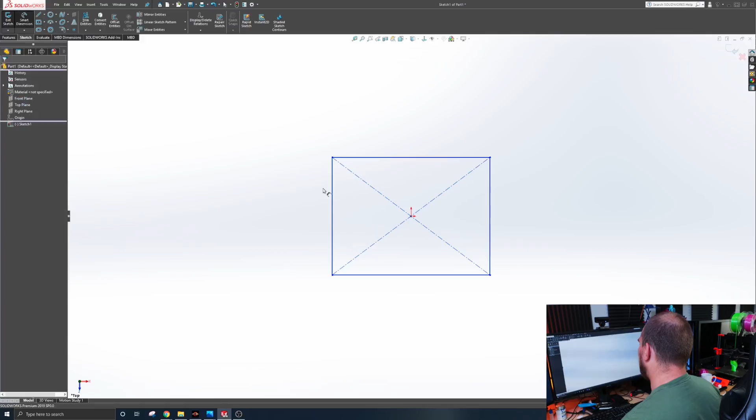Let's start with our base plate because that's where everything is going to start from, and like I said, we'll keep it simple and make it just a rectangle. We know it's got to be just bigger than a fan, so this rectangle is going to stand in for our fan bottom, so we know where it's going to lay. Want it to be on center, of course, and the easiest way to do that is just draw a line and make it horizontal. We know the dimensions of the fan, I believe, are 25 millimeters for this guy.

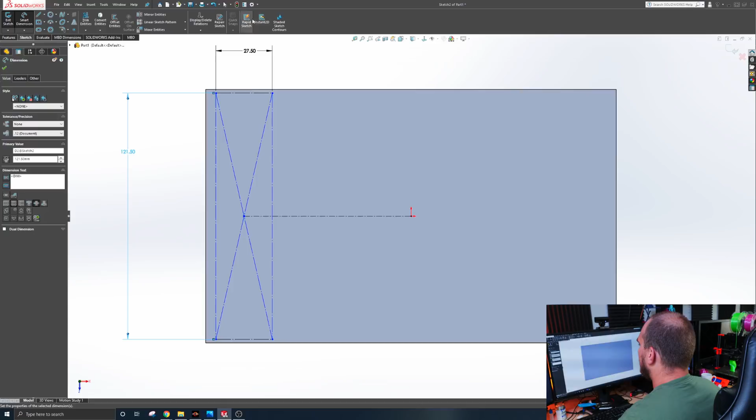2685, pretty sure that's about what we're gonna get. So we make it 27.5 - we know we got a little bit of wiggle room. Length, we'll measure it, but should be 120, 121.5, give us a little wiggle room. And we can see, what's our distance here? 1.75, we can make that wider.

Okay, that's what we want there, so now we'll just draw - basically we want locators on the corners. This is an easy way to do it without having to print a whole entire perimeter. Looking good, and now we just need to close all these up.

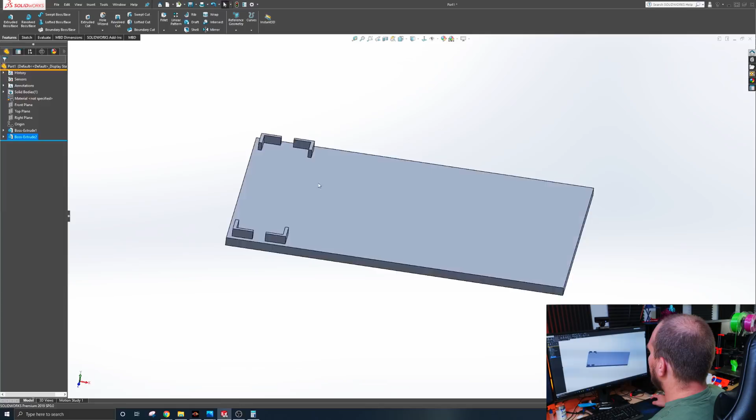Now we know our fan's going to be here, and we want the sensor head to be about 150 millimeters away. So that's going to be the base point for our holding collar, and we want it to come up 60 millimeters to put the sensor at the center of the fan disc. And there we go, we're starting something. That should hold our sensor.

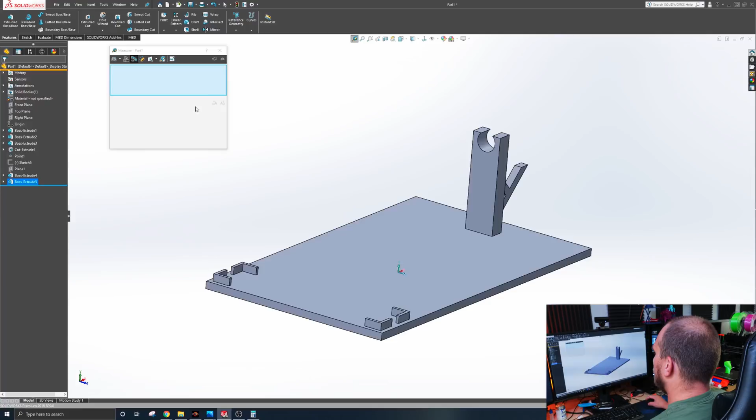All we got to do is make sure that this is all within the printable window of the Prusa. And we are just there, so we should be all right.

Now, one thing we could do is, this is a lot of wasted material since we only need this space and this space, so we can come up to the top. Why don't we cut some of this unneeded stuff away? And I think that'll do. Just put fillets around these corners just for looks.

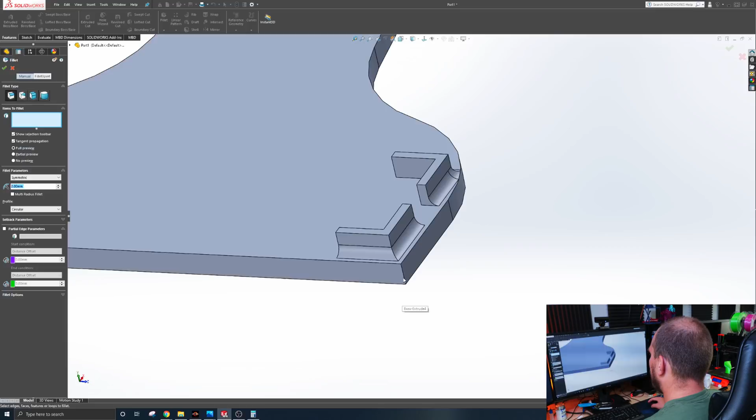So now we'll print that out and see if it does what we want it to. Hopefully it does, and we won't have to do it again.

So while we wait for that to print, we're gonna measure our space here for our victory board or our leaderboard, and go downstairs and try to make something that's not ugly.

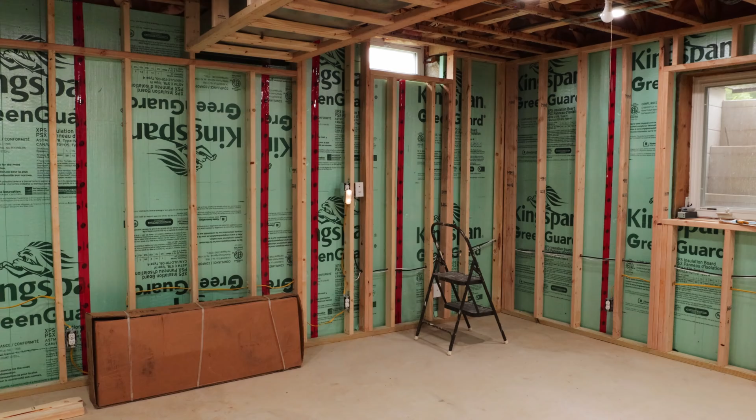So as you can see, the basement hasn't really progressed too much. I got all the electrical done, I guess. I got all my permits and everything signed, but yeah, there's no drywall. But I did have a contractor come out, look at finishing the space up, so I don't have to do it. So hopefully soon, this is where we will embark on all our projects.

But for now, we're gonna cut some wood down here. So let's get some wood, cut some 4-foot sections and see how many we need to get to 1 foot wide.

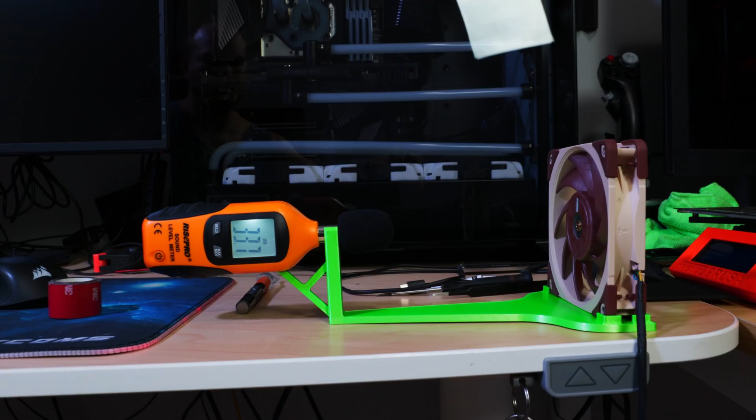And this thing works, so just so you know how I'm going to use it - fan goes here, dB meter goes here like we said. First thing I do is turn it on, get the room sound, because it's got to be in a controlled environment where it's nice and quiet. Then I'm going to turn the fan on, spin it all the way up, read what the dBA is.

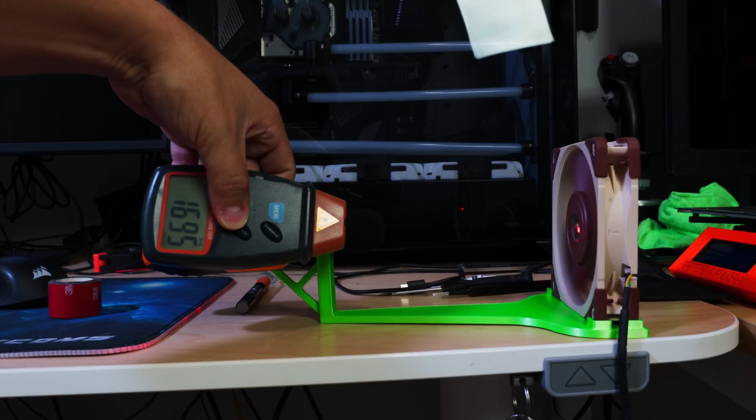Using a fan or a little tiny controller I have, I will turn the fan RPM down until I get to right around 40 decibels. Then I'll take a measurement of the RPM, and that way when I put the fan on the cooling radiator or whatever we're cooling at the time, as long as I match the RPMs up, we know that the fan's running at that noise level, and I'll do that with all the other fans. So 40 is going to be our target point.

Now, for the cool part, we're going to jump on the Fan Showdown website—or not website, it's a Gmail account—but we're gonna get on there and see how many things are in there, because I haven't been on that Gmail since I pretty much set it up. So now the reason this is so cool is because we got literally the collective mind of all of you guys out there. So if there's a good idea for how to make a fan perform well, I'm sure we're gonna find it with just the sheer amount of brain power we're throwing at it.

So let's see, I'll go back. So here's the Fan Showdown Gmail, 105. So we got 105 things. I'm sure they're not all fans, I'm sure people just sent me some notes and whatnot. But there's a lot of fans, just from what I see attachment-wise, to look at and go over in some upcoming videos. It's all the way back to the first, and here's some that I kind of already clicked on at least once. And we'll go to Bryce here with the best fan ever.

See what he's got. Download it, and let's take a peek at it.

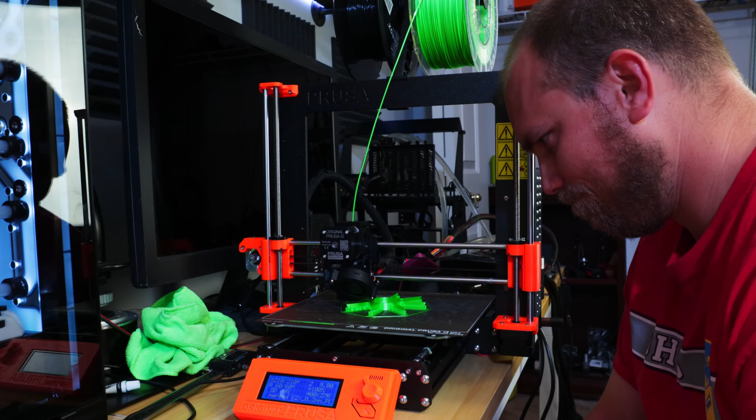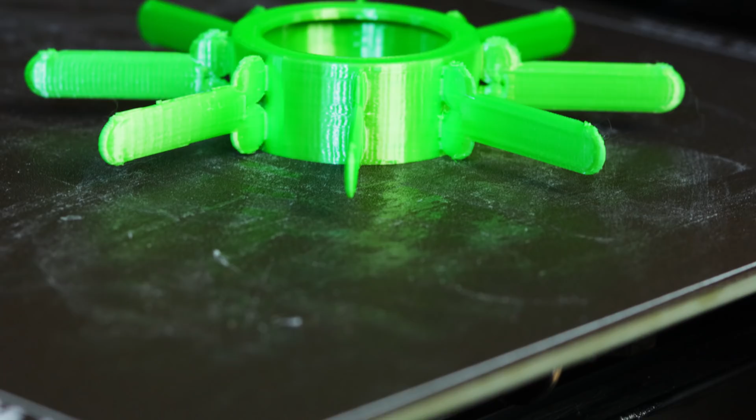Oh, I get it. Initially, I was a little concerned about the blade design that Bryce has chosen here, but I think I get it. He must just be a big fan of Austin Powers, and Dr. Evil's spaceship really gave him inspiration for this fan blade design, so we'll call it the Dr. Evil rocket fan. I mean, I'm still concerned about his chosen pitch here. It looks a bit steep, but who am I to agree? So we'll see how many RPMs we can run to get it under 40 dB, and then we'll see how well it cools. If it does, but good thing for Bryce is that this is the only fan that I've printed in this series, so he's gonna make it on the board.

I got some bad news, Bryce. She ain't working. I'm sure that you probably knew that was gonna happen as well, but yeah, we're throttling. I don't know where the air is going. It kind of feels like it's coming out of the sides. I literally almost don't feel anything out the back, but can't really tell. Oh, I know what will tell—let's smoke test it.

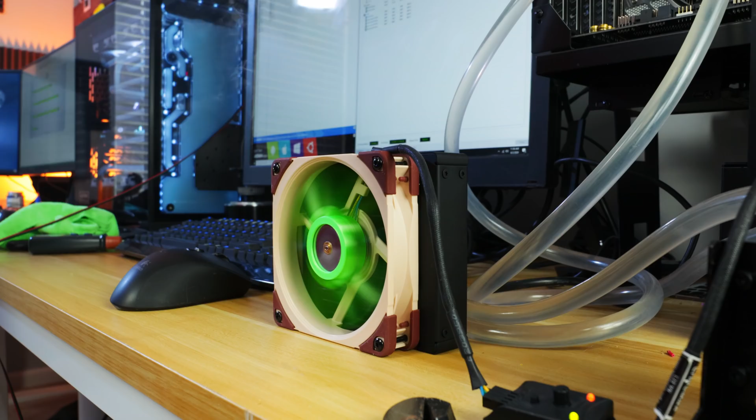The smoke test is always so interesting. So even though this is not an ideal setup, you can see that it is pulling air into the center and then just kind of flinging it off the side rather than pushing it backwards. But that's kind of to be expected when you look at the pitch angle of these little tiny rocket ships—they're not ideal. If this is a propeller, you would say the propeller is feathered, and that is not a good way to produce thrust. So it's not doing much in respects to moving air backwards, but hey, it was fun to try, fun to look at.

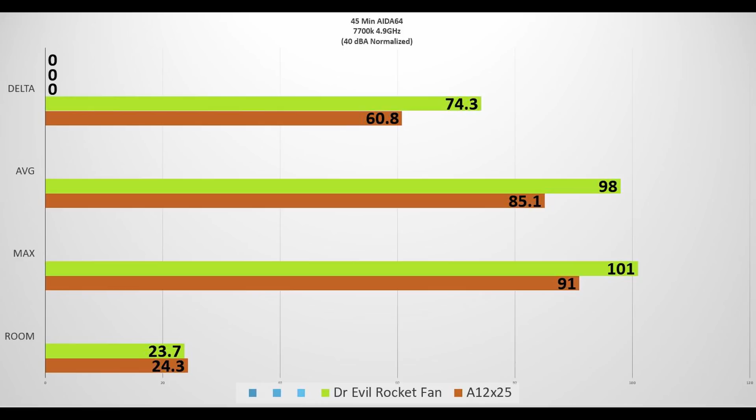I am running the A12X25 again because now that we're normalizing everything at 40 dBA, I had to tone it down a little bit. So for context, this thing to get 40 dBA spins at 1,260 RPM, where this one spins at 1,700. So you're getting more speed, more potential to move air faster. And this is the numbers that you guys are all aiming for. Obviously, this is not doing the best, should be easy to beat, but the A12X25—everybody wants to be first. But if you can beat the A12X25, you'll be a legend.

But regardless, since there's only one fan that's been run, Bryce is currently #1.